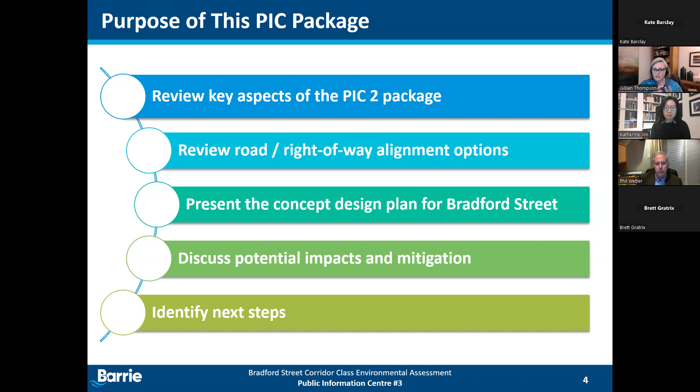So what is this study about? This project reimagines Bradford Street as a future multimodal corridor within the Urban Growth Center.

The long-range planning study will confirm and protect the right-of-way required to provide more attractive and accessible, sustainable transportation options, including improved sidewalks to enhance safety and accessibility for pedestrians and mobility device users, a new in-boulevard cycle track for all ages and abilities with connectivity to the mobility hub, GO, and the broader cycling network, traffic operational improvements to enhance safety and opportunities for transit priority measures, and a streetscape design to create a vibrant and attractive street environment that encourages active use.

Given the long-range nature of the study, there are no immediate capital works planned. This project is about protecting enough right-of-way space that the street can serve the needs of the future community to 2051.

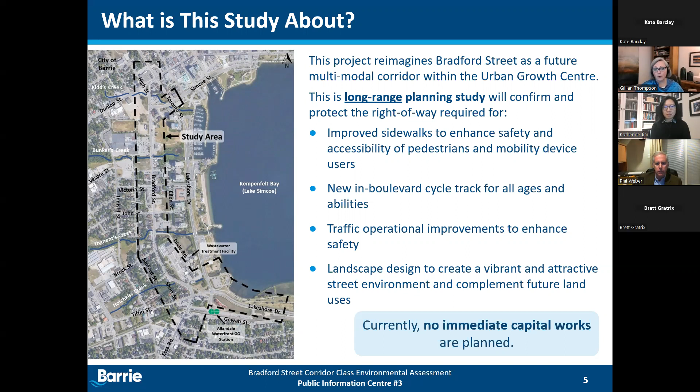The study framework we use here is called the Municipal Class Environmental Assessment, or Class EA. It's a planning and approval process for municipal infrastructure that follows Ontario's Environmental Assessment Act. There are 4 study phases with public, agency, and Indigenous community engagement embedded through the process.

We've moved through phase 1, reviewing the study background, the planning and policy context, and identifying needs and opportunities. In phase 2, we considered alternative solutions to address the needs and opportunities, and presented all of this information and the decision-making in PICs 1 and 2 in January and June of 2022, respectively. We're now completing phase 3, developing the design concept, and then moving into phase 4, the preparation of the study documentation.

In early 2023, we'll be reporting to Council, reviewing the study recommendations with Council for their consideration and acceptance. There's an opportunity at that time for members of the public to request delegation status at the Council meeting.

The date of the meeting hasn't yet been set, but will be advertised in the newspaper and posted on the project webpage. For those who've requested to be on our project mailing list, or who have registered for any of the PICs, we'll notify via email.

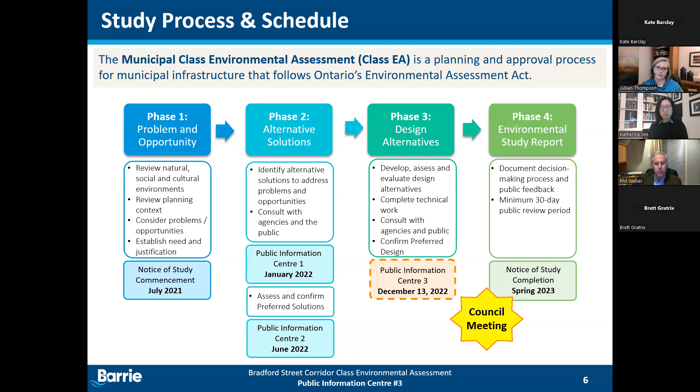The next few slides capture some of the key aspects that were presented at PIC 2 in June and provide important planning context for the decisions that we've made since then.

As I said earlier, Bradford Street is transforming, and there are numerous approved and proposed developments with more applications to come, and the city expects that the majority of the corridor will be redeveloped. The city's official plan designates lands abutting Bradford Street as high density, with a minimum building height of 12 stories and ground floor retail and commercial uses.

Bradford Street is the primary transportation link within the urban growth center and is being planned as a complete street that will be integrated with the future community and provides mobility for all users: transit riders, pedestrians, cyclists, mobility device users, and drivers. Overall, we will see Bradford Street shift to a more pedestrian-friendly environment, enabling people to live and work within a walkable community with easy access to public transit to encourage less vehicle use. That's the vision.

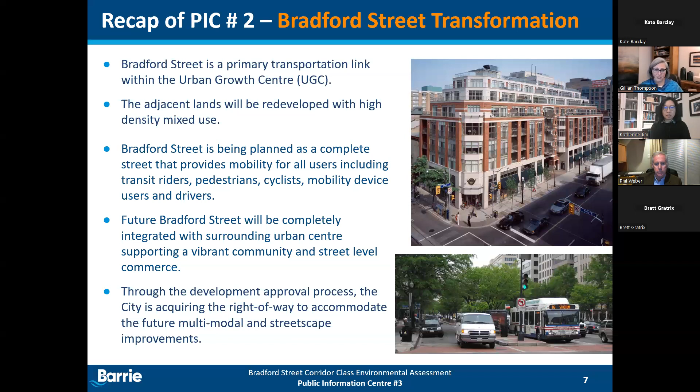At PIC 2, we talked about the list of potential planning solutions that we considered to address the needs of future Bradford Street. We looked at do nothing, access management, operational improvements, multimodal improvements on Bradford Street within an expanded right-of-way, reduced travel lanes and improvements within the existing right-of-way, and lastly, the possibility of addressing community needs by improving other corridors.

Our recommended solutions were to manage access, improve traffic operations, and expand the right-of-way to address multimodal needs, aligning with the vision for future Bradford Street as set out in the official plan and the Transportation Master Plan.

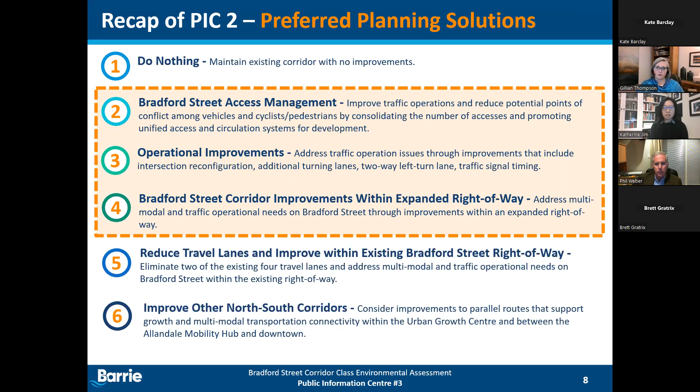Why these solutions? We're demanding a lot from Bradford Street in the future, and we need enough space to accommodate an in-boulevard cycle track and accessible sidewalks, street trees, planters and other landscape opportunities, street furniture, benches, bike racks, pedestrian-scale lighting, improved transit stops, future transit priority measures, operational improvements like turn lanes at intersections, and required setbacks for the hydro line and other utilities.

Our recommendation at this time provides the greatest flexibility for the city to respond to emergent technology and changes in travel modes and provision of additional amenities over the next 30 years. So while maintaining 4 lanes now doesn't preclude future decisions to reallocate space within the right-of-way.

And what does that mean? It means that in 30 years from now, if we see the shift to active travel and transit that we're hoping for, the outside lanes could be converted to on-street parking, electric vehicle charging stations, or an expanded flexible public space. We know that the city may consider a business case for a higher order transit network that includes Bradford Street in its upcoming Transportation Master Plan due to start in 2023. So again, we want to maintain that flexibility for future decision-making in this corridor with our recommendation.

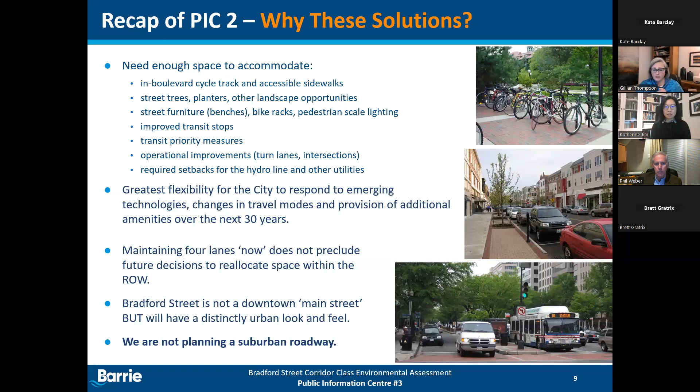So with that point, at PIC2, we introduced sketches of how future Bradford Street could look. This is one of those sketches, and we introduced this conceptual road cross-section to take a closer look at each of the elements that make up the right-of-way requirements. So Kate, this is a bit of an animation.

Let's add the sidewalk, setback, and buffer. Now let's add the cycle track and then the boulevard and curb. The boulevard space will be occupied by street furnishings, landscaping, the hydro line, transit stops, and pedestrian scale lighting.

And those all contribute to the vibrancy of the off roadway areas. Now let's add the travel lanes. We've accounted for a narrower inside lane and wider outside lane to better accommodate transit vehicles. And finally, the median area is an opportunity for street tree plantings mid-block with space for turn lanes at intersections.

As you can see, we are illustrating the hydro poles, and we've met with Alectra to talk to them about the project. The city may, in time, explore the feasibility and cost implications of burying the hydro. This isn't a decision that we'll make in this EA, but it will be something considered in future and in the context of land redevelopment.

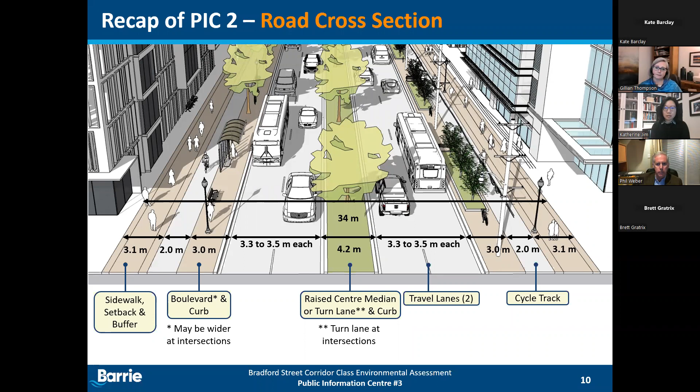In PIC2, we also reviewed the options for the Tiffin Street intersections at Bradford Street and Lakeshore Drive. Alternative 1 involves some reconfiguration and improvement while maintaining signalized intersections. Alternative 2 considered a pair of roundabouts with a mid-block pedestrian cyclist crossing to provide that connection to the mobility hub and GO. Each alternative offered distinct benefits and challenges to different road users.

With all things considered, in this particular context, we believe the signalized intersection design is slightly preferred because it's perceived by pedestrians, cyclists, and mobility device users as being more familiar, easier to access and navigate. It provides more direct routing for active users and mobility device users. It's generally better for accessibility for the hearing and visually impaired, and it's more compact and more desirable, perhaps from a human scale perspective, especially given the intensification and redevelopment that's going to occur around this area.

There may be better opportunity to incorporate transit priority measures like dedicated transit turn lanes, and generally the option has lower construction cost and is less complex in terms of design and construction. There was really good support for the roundabout option among PIC2 attendees and city staff, and certainly the city will continue to consider roundabout feasibility in other locations.

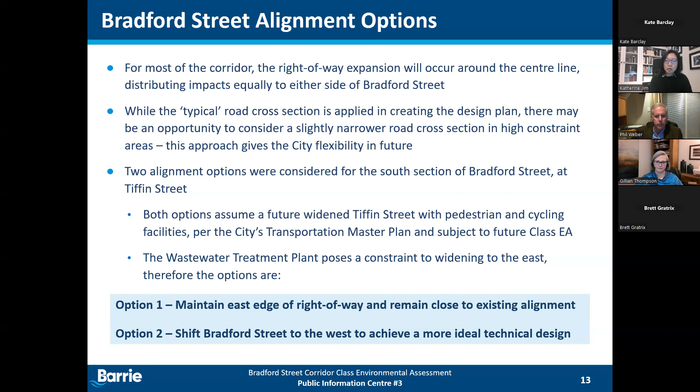Option 1 is to maintain the easterly edge of the right-of-way, close to the existing alignment of the road itself. Option 2 looks at potentially shifting it to the west to achieve a more ideal technical design.

In this slide you see the two options, with Bradford Street coming into the intersection with Tiffin Street. Option 1 is on top and option 2 is at the bottom. We have reviewed these two options in terms of land use, geometric design, and operation perspective.

Currently, Bradford Street is posted at 50 kilometers per hour, and it's assumed to remain the same in the future. Recognizing the urban nature of the corridor, we assumed a design speed of 60 kilometers per hour, which is typical when design standards call for 10 to 20 kilometers per hour above the posted speed. That means we're applying a set of design parameters for the curve of the road and the associated sight lines for this design speed.

From a geometric perspective, option 2 at the bottom is a more desirable design approaching the Tiffin Street intersection. Option 1, closer to the existing alignment, doesn't meet the parameters of our future design conditions. By providing a more comfortable angle through the intersection, option 2 allows better sight lines and overall network operation. Better sight distance also ensures safe operation for all road users, whether walking, cycling, or driving.

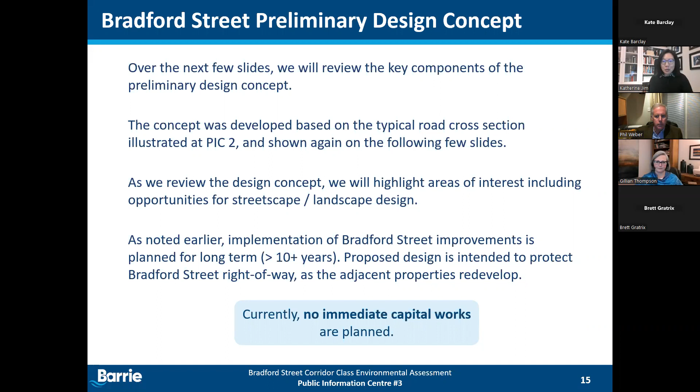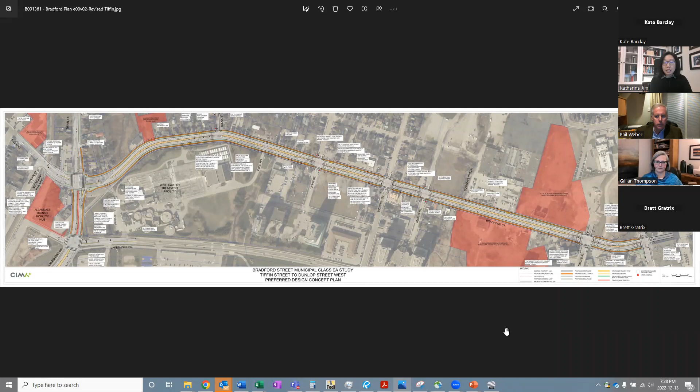On the plan itself, first off, from an overview perspective, the future development plans are shown in the red hatching based on what we found on the city's website. They're all in different stages of approval, but this is just to show that the corridor indeed is very active and more development plans may be coming.

In the middle of the plan, the gray and the lane marking shows the 2 lanes in each direction, same as existing, and generally keeping with the existing center line, other than in the Tiffin Street intersection area, where we will have a shift to the west, as we talked about a few slides ago. Now, as a concept, and as shown in the typical cross-section you saw, there may be a median provided in the middle of the road, and you see that in the yellow where landscape elements may be provided. This is conceptual only and will be subject to future development application and their approval on access management.

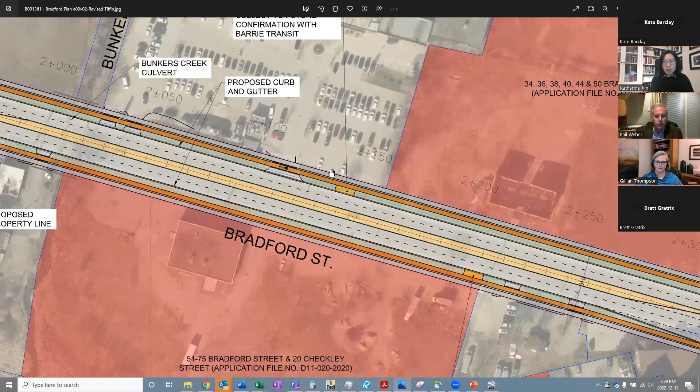Now, the boulevard on both sides of the road, these are essentially your new elements. As you zoom in, you will see the concept includes the 2.5 meter boulevard space in that light green color. Behind the boulevard, there's a 2 meter cycle track in the orange color, and the sidewalk is just adjacent to the cycle track on the outside. The boulevard space, cycle track, and sidewalk are on both sides of the road. You will see the existing property line in blue, and the proposed right-of-way line marked in a dash pink or purplish color. The land between the two lines reflects the area that will be required for the expanded right-of-way and for these new elements.

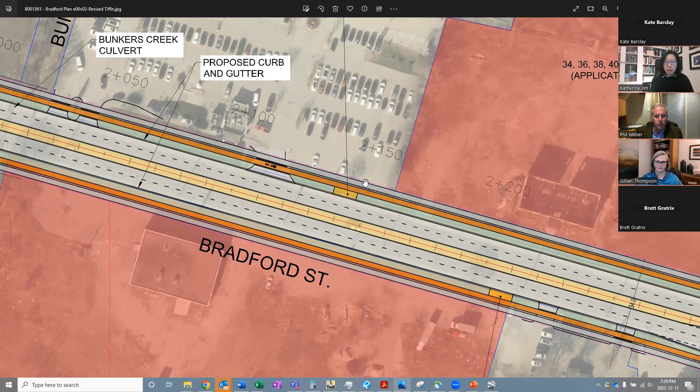So I'm going to walk through some of the main features from the south end of our study area at the Tiffin Street intersection first.

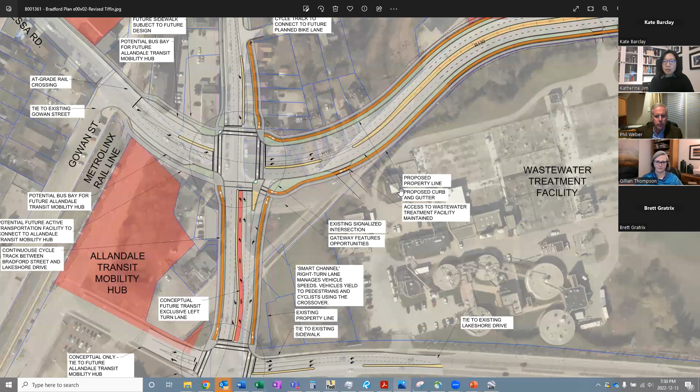Starting at the Tiffin Street intersection, we already talked about the shift to the west. In the southbound direction, we're going to be providing a double left turn, and you will see the transition of cycling facility on Bradford Street itself to a multi-use path on the west side of the road, and also a sidewalk on the east side. Just to orient ourselves, north is to the right of the page, south is to your left, east is the bottom of the page, and west is the top of the page.

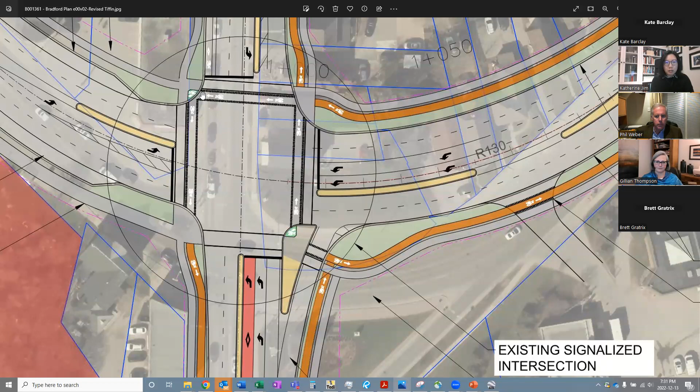At this intersection, we have space allocated for cyclists to park and wait for the correct signal to cross. Kate, if you can just zoom into the intersection a little bit, you can see the little green space that we have protected for cyclists when they cross the road. This is where they can park and wait for the right signal before they cross the road itself.

Kate, if you can zoom out a little bit. I want to highlight in the westbound direction at this intersection, we're also seeing a potential concept for an exclusive transit turn lane, and it's the middle lane that you see hashed out in the pink area. This is, once again, a potential concept for an exclusive transit lane going into the Allandale Mobility Hub.

On Essa Road, which is south of Tiffin Street, there are opportunities as well for a bus bay, depending on what the Allandale Transit Mobility Hub is planning to be. So you will see on the plan here, we've got some space allocated for a bus bay where the bus can pull in, again, for people coming in and out of the Allandale Mobility Hub.

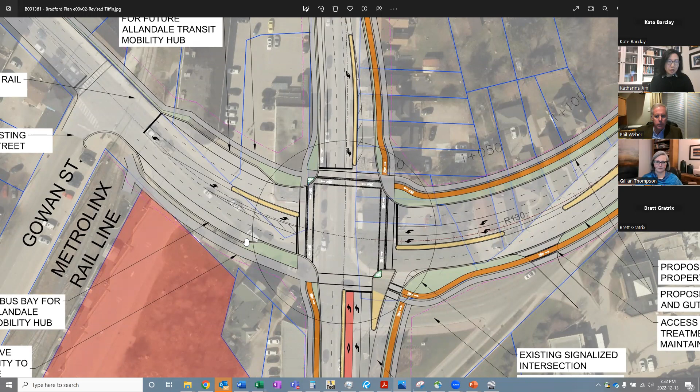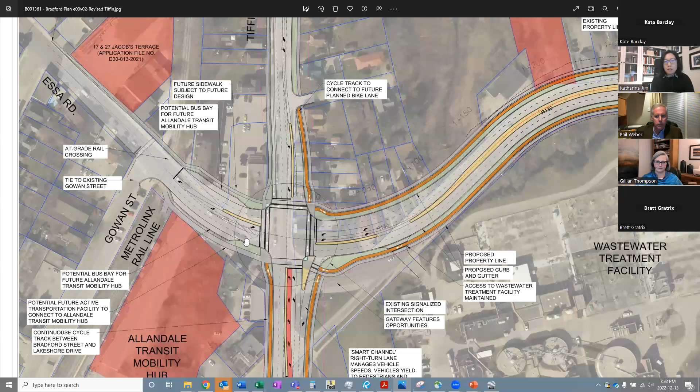By the time Essa Road approaches the existing rail track, the road will generally be reaching the existing elevation again, so we're not looking at major reconstruction of elevation at the intersection itself. Now, in the northeast corner at Tiffin and Bradford Street, because of the shift in the alignment, there's going to be opportunity for a gateway feature and other landscape elements.

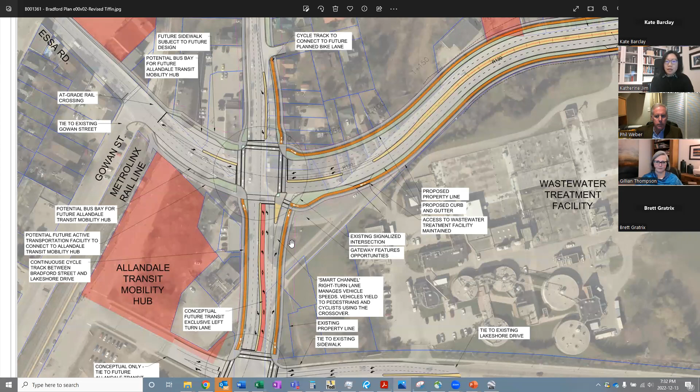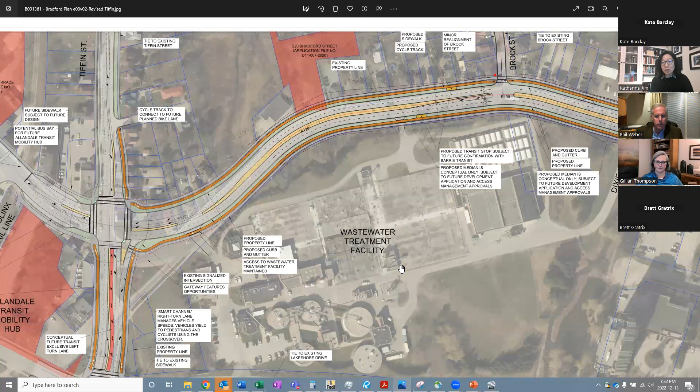As we head north from here, we see the water treatment plant on the east side. This aerial image is quite clear, you can see the water treatment plant itself. The existing access into the water treatment plant just north of Tiffin Street is going to remain. The treatment plant itself is a constraint, and the expansion of the right-of-way will largely be to the west in this vicinity, all the way up to just past Brock Street.

So this whole stretch between Tiffin and up to Brock Street, generally the expanded right-of-way will be to the west. We do take note of the location of the new right-of-way line for Bradford Street and the associated property impact. But again, we want to emphasize that this corridor is for the future, and improvement of the road will be driven by redevelopment.

You will see that we have made some notes of transit stop locations. For example, the one just south of Brock Street, you're going to see the little orange square there. Now, these locations are based on conceptual input from Barrie Transit. Recognizing these may change in the future, but essentially the footprint required for the transit shelter itself may be within the space of the boulevard.

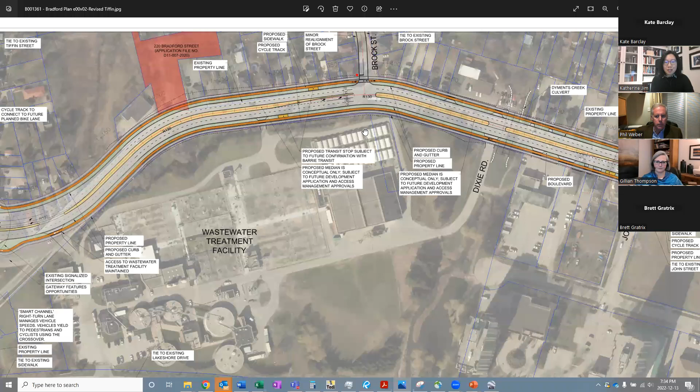Now, at Brock Street, this is our first intersecting side street. There's going to be a minor realignment to the road itself for better geometry and better sightline when turning into Brock Street.

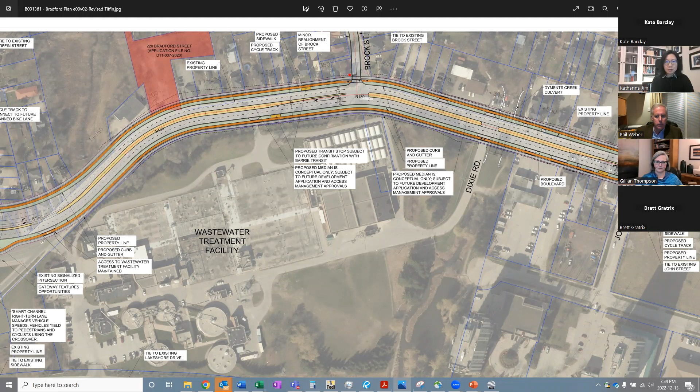As we continue north of Brock Street, access to the water treatment plant remains at Dixie Road. Again, you continue to see the median that is throughout the road in the yellow highlight. As we approach John Street, and from that point on to the north, the expansion of the right-of-way is generally along the center line. That means the frontage impact to the property on both sides are relatively similar.

At the John Street intersection, Kate, if you would just zoom in, and also similar at other side streets, you will see as an example that we have a cross ride going in the north-south direction. That's where the cursor is. You can see the marking on the street itself. That means this cross ride facility allows cyclists to continue their ride on the road without dismounting.

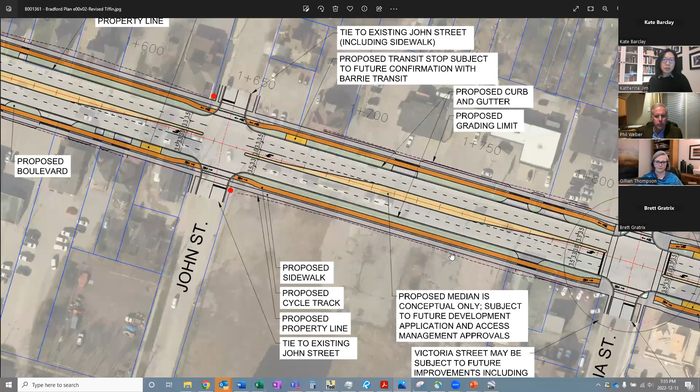You will see that the bike facility from Bradford Street will transition to the on-road facility at the side street. However, the sidewalk will be able to continue as you turn into the side street. And this type of treatment is actually very similar as we travel towards Victoria Street and Vespra Street. So Kate, if you want to pan very slowly so everyone can see, that's generally how it looks.

Now in this section of Bradford Street, again through John Street, Victoria Street, and Vespra Street, we do have a left turn lane provided at each of these intersections, once again allowing the ability to turn into the side street itself. Victoria Street will remain as a signalized intersection, and John Street and Vespra Street will remain as stop control.

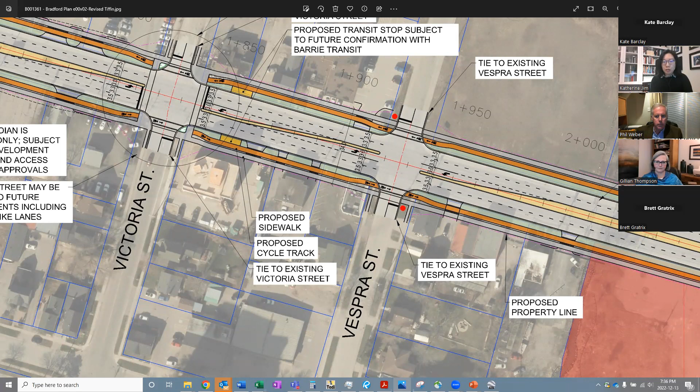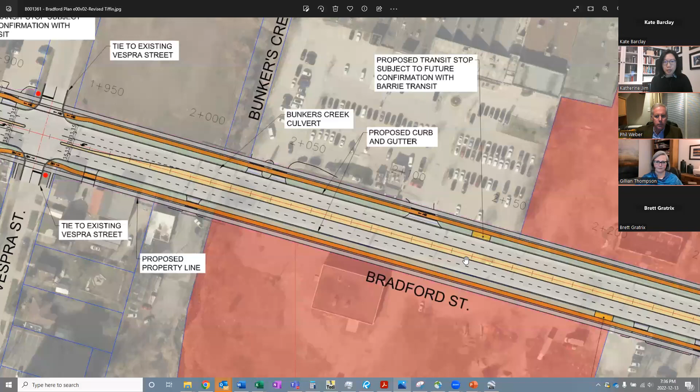As we continue to travel north and approach Simcoe Street, you will see the proposed development hatched out in red on either side of the road. Once again, the intent of this concept plan will serve as input when reviewing development applications, allowing the city to explain how much of the roadway elements is required to be protected within the road right-of-way, and how far the setback is required from the development property.

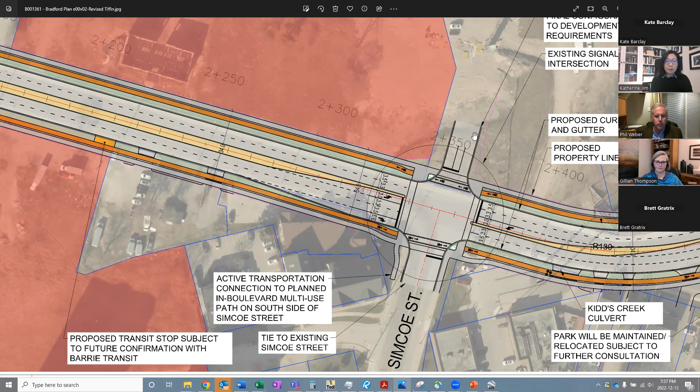Now at Simcoe Street, we do recognize that at that particular intersection there will be a future west leg into the development. We're only showing a very short stub in the concept, again recognizing that the full development of this intersection will be subject to the future development plan. As we continue to travel north on this plan, we're almost reaching our northerly study limit at Dunlop Street.

Our outside lane traveling north will become the right turn lane and drop off as we head onto High Street, because High Street is one lane in each direction. So we will have to drop one of the two lanes, but we will still have a left turn lane being provided at that intersection.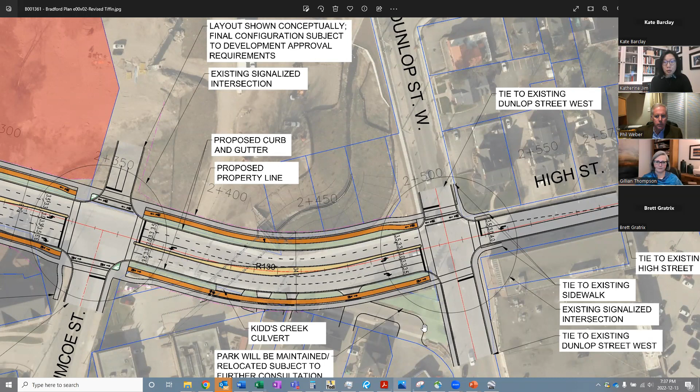The existing channelized right at Bradford and Dunlop is proposed to be removed. The driveway access of those properties on the east side will be replaced with a laneway, and the existing parkette in the southeast quadrant of Bradford and Dunlop will be shifted as well. In detailed design, there will be opportunity to look at how some of these features or materials within the parkette may be reused.

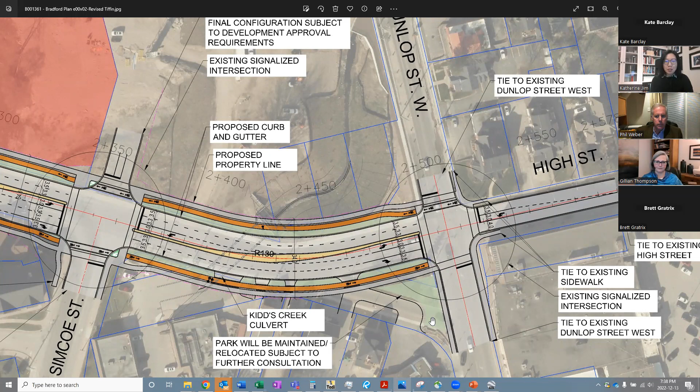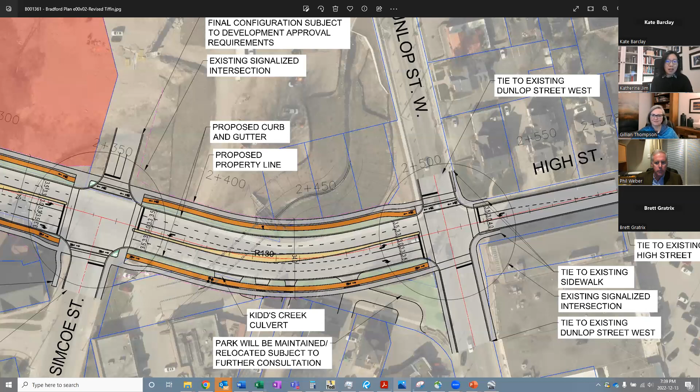Now, this is a very quick overview of the preliminary design plan. There's lots of information, and I'm sure it will take some time to digest, and there will be some questions towards the end of the presentation. The takeaway message is that this is a concept plan showing the future expanded right-of-way that may be planned to accommodate not just vehicles, but cyclists, pedestrians, transit, as well as opportunities for landscaping. Particularly in the area of Tiffin Street and Dunlop Street, there's potential for gateway features. So with that, I'll pass the presentation back to Gilly, who's going to show us a few renderings on how Bradford Street may look and the landscape design elements.

Thanks, Katherine. And Kate, before you leave that plan, I used the term access management earlier in the presentation, and it's sometimes hard to understand what we mean by that. But this plan view gives us a really clear picture where we have these stretches of Bradford Street with a continuous median and we're not showing any entrances to the development areas. There will be entrances, but our goal is to try to reduce the number of individual entrances and consolidate entrances into the new developments.

And why this is important is when we think about the objective of getting walkers and cyclists out into this corridor, we want to make sure they're able to move freely through the corridor without numerous stopping points at individual entrances and driveways. So when you heard me talk about access management as one of our recommendations in this project, that's what we're talking about - keeping those entrances consolidated in this future corridor, reducing the overall number, reducing those potential conflict points, so the corridor can operate as intended for active users. I just wanted to touch on that quickly before we left the plan.

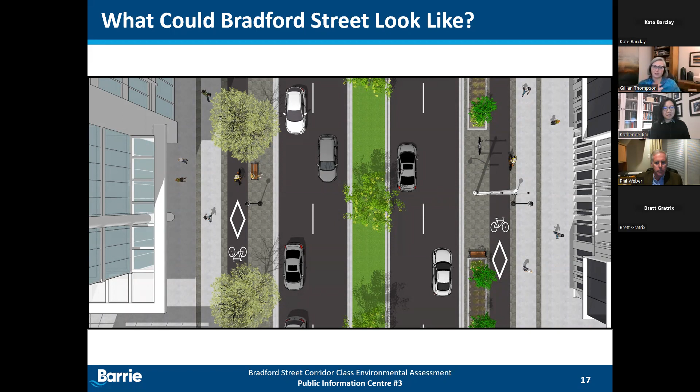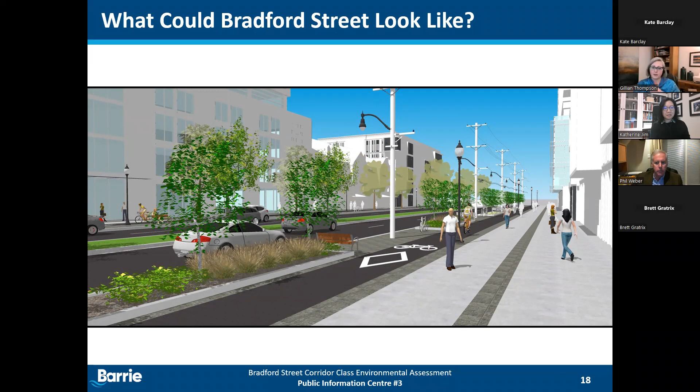This is a view from the other side of the road, and again the same idea with opportunity for trees in the median, trees in the boulevard, with the benefit in terms of thinking about climate change, shade, and lots of benefits there.

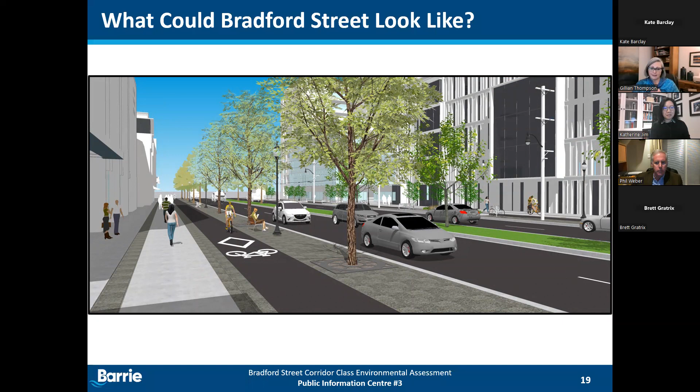Katherine alluded to this. In the next phase of design, a streetscape plan will be developed that lays out all the aspects of landscape plantings, furnishings, pedestrian scale lighting, and gateway features. The environmental study report, or EA document we're producing at the end of this study, and the design concept will reflect the design intent and principles to be considered in future. We want to make sure we're communicating the vision and intent of that streetscape plan for future designers. In terms of inspiration, we see opportunities for a really visually impactful gateway, like the Thunder Bay sign.

That's envisioned at the south end, adjacent to the wastewater treatment plant, where we're gaining a little bit of space. We could have enhanced intersection areas at the primary intersections at Tiffin Street and Dunlop Street - we already have those areas, it's just maintaining and enhancing them. There are street furniture examples, and even maybe a transit stop design. There are so many great opportunities to create a vibrant and unique corridor along Bradford Street, and we want to create that excitement for this future vision in the plan.

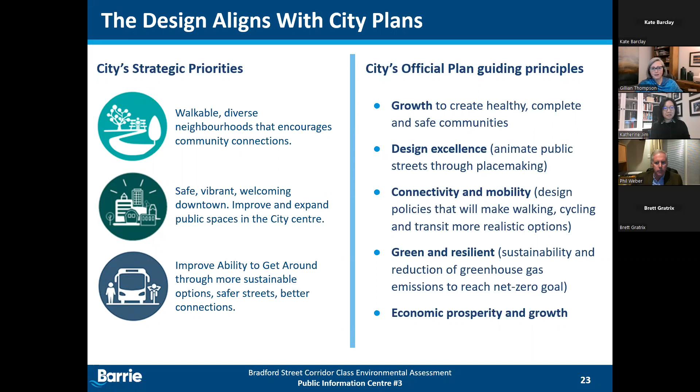We believe the design concept we've developed for Bradford Street aligns very much with the city's strategic priorities around walkable, diverse neighborhoods, improved and expanded public space that's safe and vibrant, and more sustainable mobility options and better connections. With the design concept and principles we've set out for future detail design, the focus will continue on accommodating planned growth in healthy, complete communities, creating a benchmark in design excellence by making Bradford Street a prominent place in the city center, a true destination with interesting aspects to draw people in, connectivity and mobility, green and resilient infrastructure, and supporting economic prosperity in creating Bradford Street as that desirable destination.

With the design concept complete and the future right-of-way requirements identified, we can now move on to completing the impact assessment, and that'll be our next step. In doing so, we consider potential positive and negative effects to socioeconomic, cultural heritage, and natural environments. We'll be looking specifically at drainage and stormwater, groundwater source protection, built cultural heritage and archaeology, natural environment, property and access, and climate change considerations.

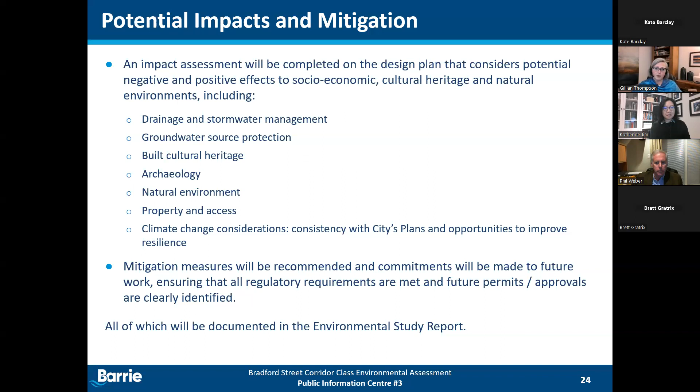We'll also be recommending at a high level, preliminary mitigation measures, and we'll be making commitments to future work, ensuring that all future regulatory requirements are met and future permits and approvals are clearly identified. This is a long range study, and we really see the commitments to future work as so important to guide further design and implementation in the future. All of this will be documented in the environmental study report, or the EA document.

So in terms of property impacts, what if your property is impacted by the project, and what does this mean? For properties that will undergo redevelopment, the recommendations in this study are for long-term protection. This means if a developer was to purchase your property or develop a property they own, that developer will need to convey to the city the identified road right-of-way as a condition of approval. This is a typical requirement and common across the city and in growing municipalities, and is how rights of way are conveyed to municipalities through the development process.

For properties that do not undergo redevelopment, when the city proceeds to implement the project, the city will purchase the required properties at fair market value. There's a whole realty process around that that we won't get into here, but if you're a property owner and you've got questions, we can take those conversations offline. Again, the project isn't budgeted in the current 10-year capital plan.

But if you are a property owner and have more questions about the project and how it relates to your property, please reach out to Brett, the city's project manager, after this meeting, and we can set up a time to have a conversation about your case. In the interest of time tonight, we know there will be interest, but we don't want to spend general time focusing on property by property questions. So follow up with us after - we're happy to have those conversations. We'll review Brett's contact information at the end of the presentation.

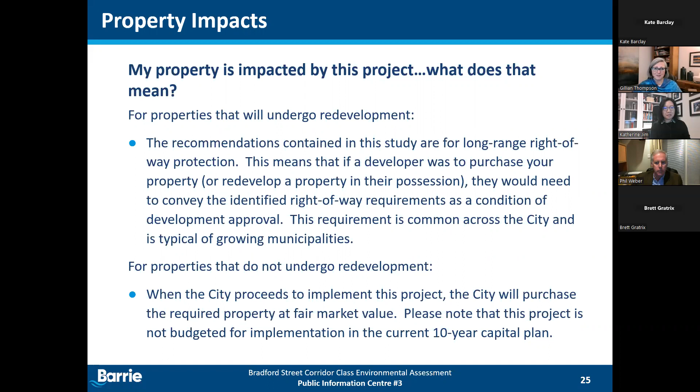Thank you for sticking with us. It's taking a little bit longer than we had anticipated, but lots of information.

In terms of next steps in the EA process, the project team will review and consider all the feedback we receive from the public, agencies, and Indigenous communities. We'll refine the design concept in light of the feedback where it's appropriate. We'll complete the final impact assessment, the preliminary mitigation recommendations and commitments, prepare the environmental study report to document everything, and prepare a staff report to council containing the study recommendations for council's review and acceptance.

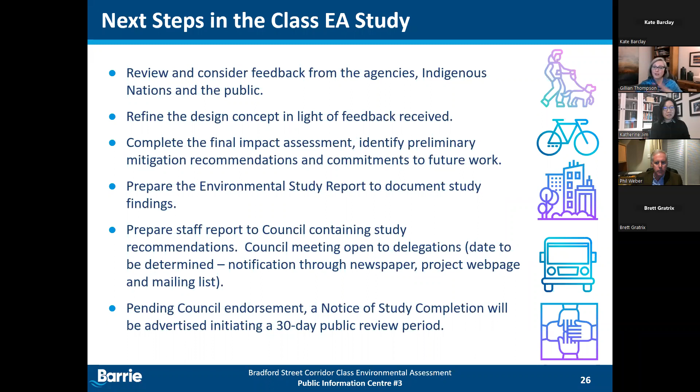That council meeting will be open to delegations. The date is to be determined. We'll be notifying through the newspaper, the project webpage, and if you're on the mailing list or have registered for any of the PICs, you'll get a direct notice. Pending council endorsement, we'll issue a notice of study completion that starts the 30-day public review period, where you have a chance to look at the entire EA document.

Beyond this Class EA study, we wanted to talk about this because of the long range nature of the study. The shelf life for a Class EA study is 10 years unless any aspect of the plan has been implemented.

This Class EA is about long-term protection, but the implementation of the design will be driven by the pace of redevelopment. If redevelopment advances quickly, the implementation timeframes may be accelerated. The capital program is reviewed each year by council, and priorities are set based on what's happening in the city, and various pressures and priorities shift from year to year.

If development occurs at a more modest pace and 10 years elapses with no part of this plan being implemented, then the Class EA study will be refreshed or updated through an addendum. The addendum basically confirms or refines the design plan relative to the transportation and planning context of the day, and it would also include a full consultation program similar to this EA study.

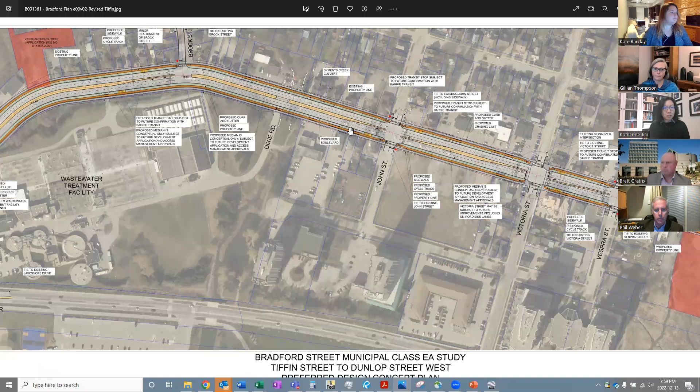So maybe with that, we'll get on to some of the specific questions. The first is actually a comment about potential impact to properties on Sanford Street, a parallel road to the west of Bradford Street between Brock Street and John Street area. The question is whether any property will be expropriated by the city to accommodate this plan. Our design concept plan shows the expanded protected right-of-way on Bradford Street only. Property on the adjacent parallel street is not expected to be impacted directly as a result of the improvement on Bradford Street.

Our next question relates to how we may use the right-of-way space, for example, whether consideration of automatic public toilets or a restroom area may be considered in our right-of-way layout. At this time, we haven't fully explored the detail of what may be some of the potential elements in the right-of-way, but that's certainly an interesting and good suggestion. Those are some of the emerging technologies and things we will be grappling with accommodating in the future.

So we haven't addressed that specifically, but this kind of falls into that category of things coming that will be looking for space in the right of way.

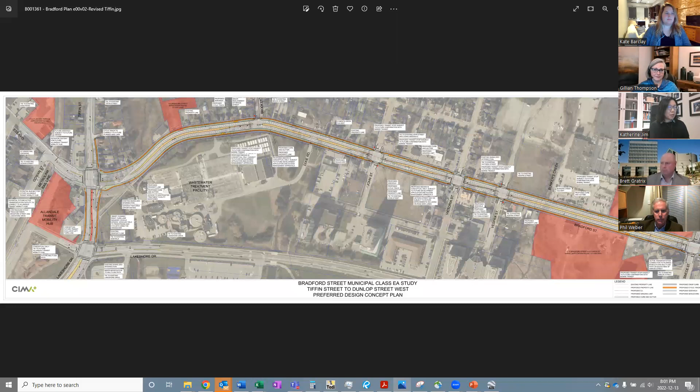Good question, thank you. The next question references a meeting with the consultant for the proposed Performing Arts Center. That meeting happened last week, and it noted that the architect advised Simcoe Street itself would be extended to the west of Bradford Street and disappear, contradicting our plan.

I think in this case we do acknowledge that there will be a different type of development happening on the west side of Bradford Street, with Simcoe Street being extended. We do recognize that. But at this time, the plan is certainly very active, and I don't think there's a specific approval process at this very moment. So we do acknowledge that the road itself will be extended.

Gilly, did you want to add? I'll just add that we'll make sure what we're reflecting is current as of when we finalize the report. Your point's taken that things are very fluid right now with the development applications, and essentially when our report is finalized, we'll have to timestamp it and accept that it reflects known conditions at the time of finalization. Thank you for the heads up, and we'll track that and follow up with Brett and city folks as well.

Just to clarify, the west leg of that intersection is more of a placeholder. There will be access of some sort, but that's still being worked out. We'll finalize it based on the best available information at that time, as Gilly said about timestamping, and then it'll be an ongoing live discussion with the development parcel on Bradford Street and the Performing Arts Center about what that looks like. This isn't going to tie them into a very specific design at this point, just a general concept.

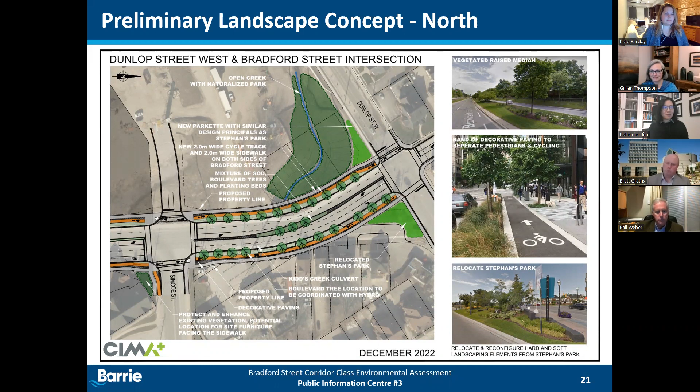Mute, Phil, you're on mute. You're still on mute. Sorry, third time's the charm.

I think we kind of missed the comment about the welcome sign for downtown Barrie BIA, but that's just a general comment. I think the trade-off for Bradford Street and Lakeshore is that Lakeshore is more of the scenic drive, and Bradford's going to handle the heavier traffic from downtown to the Allandale GO hub. So that's kind of the vision.

Bradford's going to be more of the heavy-duty traffic spine. It's slated to handle a significant amount of traffic, and that's what the modeling is going to show. We expect it's going to be a fairly functional corridor. Having said that, both corridors are going to handle a fair amount of traffic, and there's only so much we can do to disperse traffic between the two. So the traffic's going to go where it's going to go, and both roads are going to be busy commuter corridors no matter what we do.

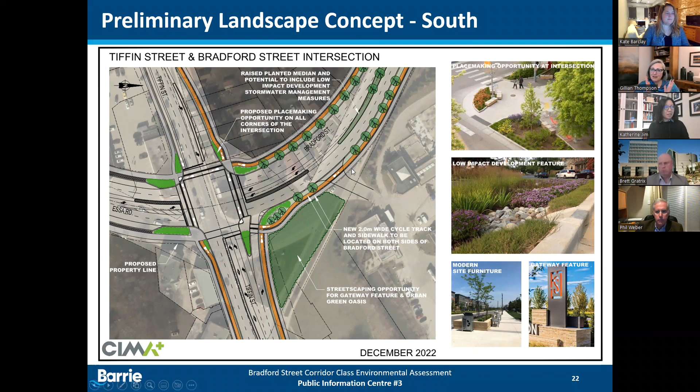Brett, great, anything to add? No, that's great. And that's the real benefit with this process, is that we'll be able to take a lot of these suggestions back and put them for future consideration, whether it's through detailed design implementation, or if we find ourselves doing an addendum to fine tune some of these details and excellent suggestions.

Great. So we have a question about more of the EA process itself. It's asking, what does it mean in terms of shelf life in the next step of the Class EA in 10 years? So Gilly, maybe you can expand on that.

Oh sure, I'm just looking for that question, it must be a little further down. What we mean by shelf life is when a Class EA is completed, we look at existing conditions, the planning context, the policy context, and all of those elements factor into the decisions we make and the recommendations of the EA. If more than 10 years has elapsed since the EA was completed, and there hasn't been any movement in terms of implementation, like nothing's been constructed, then it's good planning practice, and actually required, to go back and recheck all of those elements.

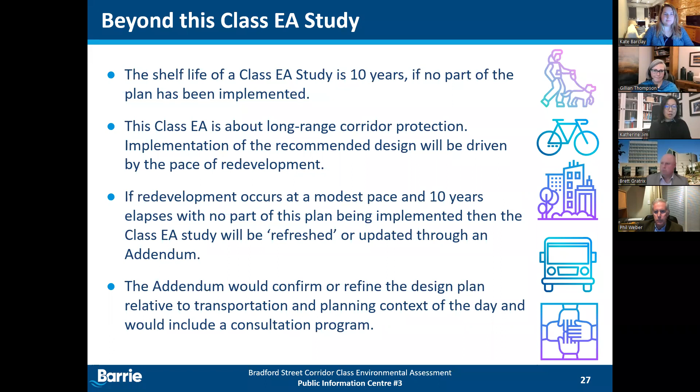Thanks, Gilly. Back to questions related more to community impact. We have a question: we haven't mentioned anything about the potential effect on the quality of life of residents living out on Sanford Street, and buildings that are 3 stories high are going to create some shadow effect on family homes, and this is going to be a problem.

So I think that's more related to the future planning of the corridor itself. So Brett, perhaps you may want to take this one. Yeah, more of a land use planning question.

This is really focused on the corridor in response to the official plan, as a parent document the city uses to then build upon children plans, which would be your master plans. So the land use planning comments probably go best towards the OP, the official plan, which was just updated. And then our zoning bylaw coming out as well, which will be the next opportunity in Q1-ish on buildingbarrie.ca to provide feedback on building height and building massing. But we can definitely take that comment and pass it on to our planning department. Thank you.

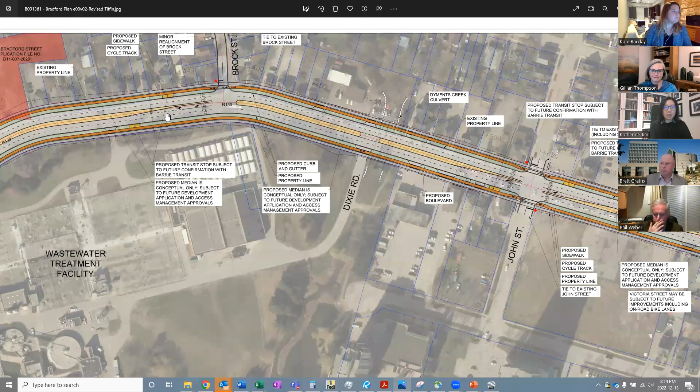The next question is related to the Bradford and Tiffin Street intersection. The comment is that the right-hand slip lane is being maintained at the intersection itself, and that these slip lane designs are known to promote high speed and a dangerous situation for pedestrian and vehicle interaction.

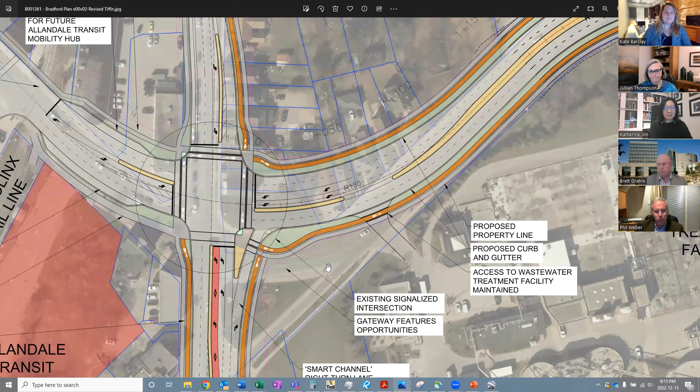I think we're talking about that channel going from westbound Tiffin Street onto Bradford itself. So maybe Phil, I'll let you take this one. Sure. Yeah, we've changed the design of the slip lane. Before it was a much broader and wider design, which promoted high speeds. We've changed it to what we call a smart channel design, which ends in a yield condition.

So drivers come to a yield or almost stop, then look to the left and make a right turn. But this isn't cast in stone. We do need some sort of exclusive right turn because the right turn volumes are really, really high. So it could be a smart channel design like this, or it could be just a right turn lane, an exclusive right turn lane.

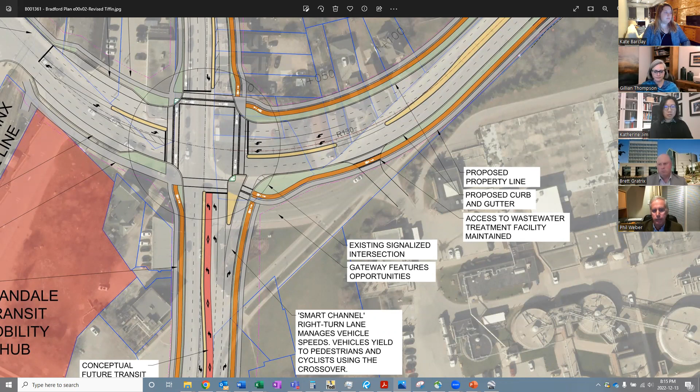This is what we've done at Bradford and Lakeshore - we're just showing a right turn lane there. So it could be either a smart channel design like this or a right turn lane. We've shown the smart channel design here and the right turn lane design at Bradford and Lakeshore. So it could be one or it could be the other.

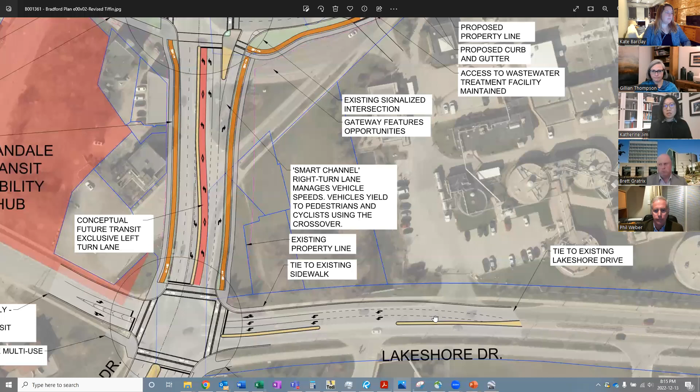Here we're showing just an exclusive right turn lane, more because of the geometry of the intersection - it's coming in at an angle, so it's easier to design a simple exclusive right turn lane here than a smart channel design. But these are just preliminary designs. Detail design is when you make the final decision on these types of things. So for now, we're showing one design at one location, one at the other. But in detailed design, you'd make the final decision as to which design you go with. These aren't cast in stone at this point.

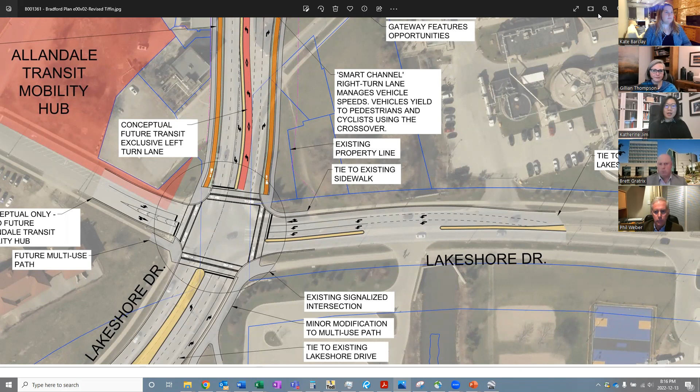Great, thanks Phil. Our next question is related to the dimension of our cross section. The question is asking about the width of the travel lane that is out there now, and also whether we have considered a 3-meter lane for the future design, as it is a more urban road, and that 3-meter width could provide greater traffic calming, safety, and pedestrian access.

So just reflecting back, our typical cross section right now is showing an inside lane of 3.3 meters and an outside lane of 3.5 meters. So maybe I'll start off with the answer.

I think, as Gilly mentioned, the cross-sectional element at this point is what we're proposing as a concept. So in the future, it does allow the city to make certain modifications in the cross-sectional element dimensions. In this case too, we also need to think about what the lane needs to accommodate - for example, transit vehicles sometimes have certain requirements when it comes to lane width. So we do need to take that into consideration as well.

Brett or Gilly, do you want to jump in?

I think you've explained it well. We're being a bit cautious about being overly aggressive, recognizing we're not moving to implementation. There will be steps in between. One concern is if we move to higher order transit, accommodating that width. We don't want to tell a story where we're demonstrating a surplus of width. These are reasonable lane widths, not saying they couldn't change.

But that's a real concern, that next step of transit, and what that needs in terms of right-of-way space and lane configuration, which may get bigger depending on what that looks like. That would be subject to justification through our transportation master plan update. But the biggest takeaway is none of these dimensions are absolutely fixed in stone, and there will be adjustments to them closer to implementation based on the context of the day on the corridor.

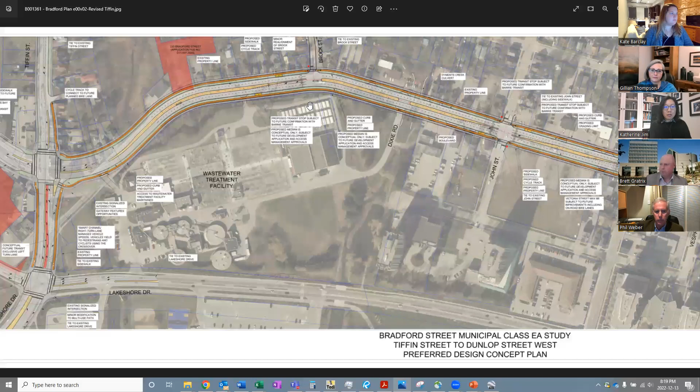Thanks, Brett. Our next couple of questions relate to the intersection itself. One asks whether a traffic light is actually needed to safely cross Bradford Street at Brock Street. Right now, pedestrians need to go northbound to use the northbound bus stop, and will have to walk about 400 meters south or 500 meters north to safely cross. A similar comment was made about crossing Bradford Street at John, which is also a challenge, and why stop signs are still being recommended except at Victoria.

I think the signalized intersection at Victoria is an existing signal, so that remains. At the other locations, maybe Phil can jump in on what our traffic analysis shows about the operation of these intersections, at John and also at Brock Street in particular. I'd have to dig up the traffic report, but I believe in the future these intersections will be signalized. It's just a matter of at what horizon period the conversion would happen.

So on our plan, we're showing it as a stop sign, but in future the intent is to signalize them. But that doesn't help those people right now who are trying to cross the road, I realize. We'll take that comment back because that is a long stretch of roadway, so thank you for that feedback.

Maybe a related question is how the design aligns with the city's goal of Vision Zero. That's a great question.

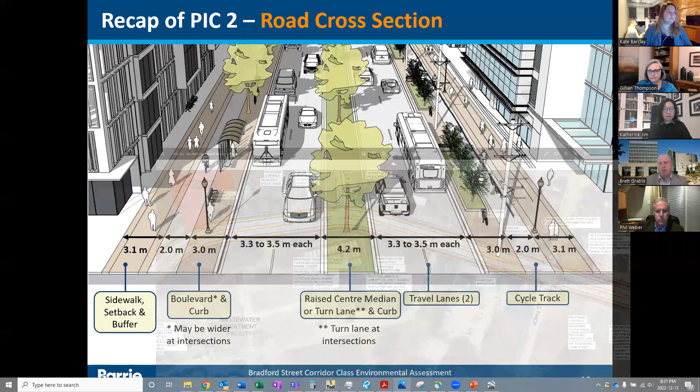I think the big improvements are multifaceted. Creating safe space for pedestrians and cyclists is the number one thing we're doing here. Right now we have curb face sidewalks, which is a lower level of service, probably at the bottom end of the active transportation level of service rating scale, and we're advancing that to the highest end. Moving to a fully physically separated cycling lane is again a very high level of service, and moving that farther away from the travel lane as much as possible pushes that even higher. So making sure we're taking care of our most vulnerable road users is the most important part of Vision Zero, and advancing that.

The other big element is the access management perspective. That ties into Gilly's comments about working with the development community to embrace the bigger picture and push them toward consolidating accesses on this corridor, which also improves safety for road users as well as those in the boulevard and active transportation.

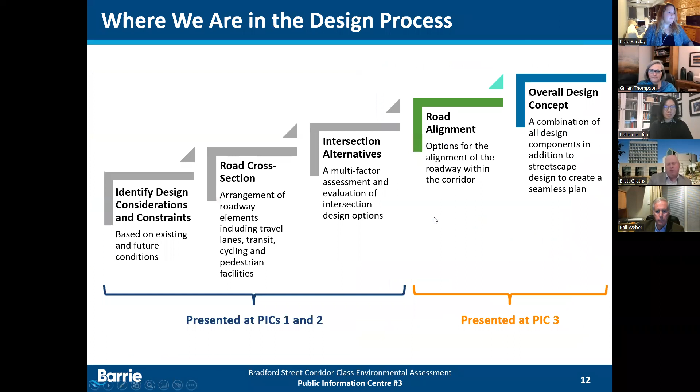The third element is the improvements proposed as part of the realignment of the intersections at the south end, especially Tiffin and Bradford Street. That shift to the west significantly improves sightlines to the intersection, as well as the tangent approaches. We're not having as much curvature through that intersection as there is today, which would get worse with alternative 1. Alternative 2, which is what we're recommending, is a big improvement over what would be there.

So it's kind of a multi-factored approach in this design. When we do go to advance this project further, we'll be looking to test this against latest best practices to make sure that we're in alignment with that. Even things like what Phil was talking about with the smart channel, is that the best case? We'll also be looking at the curve radiuses themselves and the geometrics of the roadway. Can we tighten up any of those radiuses to help slow vehicle speeds down, just based on better geometric data when we do go to design that road. So that'll be part of the commitments we make going forward. It definitely will move the bar significantly forward in the lens of Vision Zero.

Great, thanks, Brett.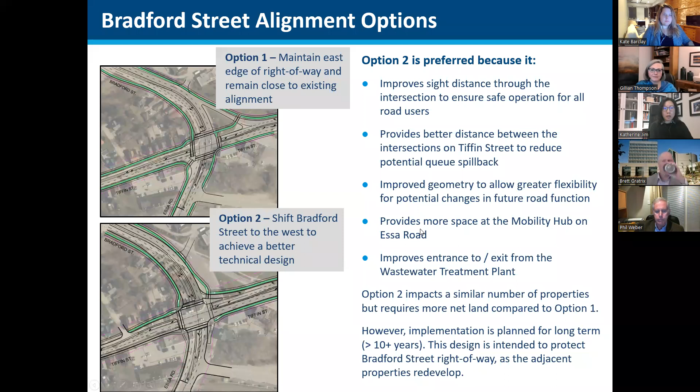We have a couple of questions regarding the road element itself. For example, one comment suggests it would be helpful to make one of the car lanes a dedicated transit lane, and asks whether that's an option. I think Gilly pointed to it that the city will be carrying out a transportation master plan in 2023. The question of the potential of higher order transit is intended to be answered at that time. So Gilly or Brett, what do you want to expand on that?

I'll maybe add to that, and Brett can jump in. Certainly with the current transportation master plan, the option or possibility of having an HOV, a high occupancy vehicle/transit priority or transit lane for that outside lane, was identified even in the 2019 transportation master plan. So that's definitely on the radar, although we haven't shown it in our typical cross section. The intent is there. We're recognizing the possibility of those outside lanes becoming dedicated transit lanes. That goes back to some of the rationale and decision making when members of the public early in the study asked, can you reduce this to two travel lanes and make improvements within the existing corridor? That desire to have dedicated transit lanes to encourage ridership and transit efficiency was certainly part of our decision making at that time. So it's a great suggestion, and it's definitely something the city's been contemplating, and this plan protects for that.

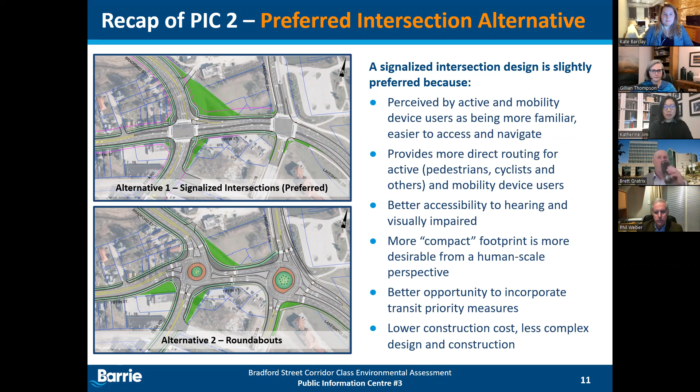Okay, thanks Phil. We have a comment here asking whether Barrie would consider not having as many turn options through the boulevard, and instead having U-turn lights at each intersection for those needing to access the opposite direction. Brett, maybe you can comment on the city's experience.

That's a comment we can take back. One of the challenges is it does take more right of way.

That's probably the biggest barrier to that, but that is a potential solution to the median barrier challenge. There is a grid network in that area as well, recognizing there are pros and cons with that. But that's something we can take back and look at, while staying cognizant of the feedback we're getting about not creating more right of way. So it's a delicate balance for this corridor.

Our last question this evening is asking about who's going to be paying for the proposed improvements, and whether this will result in higher property taxes.

A lot of this work is attributed to growth, so it will be captured in our development charges study. It is today, but not to this level of urbanization. When we see the development happen on this corridor, as envisioned through the official plan, the business case should be there to justify the investment in creating a pedestrian-friendly space. What we're seeing from internal feedback and external consultants is that investment in the public realm and active transportation helps offset investments in additional lane widening, keeping the corridors a bit narrower. So it's important to keep the financial conversation in context of the broader network.

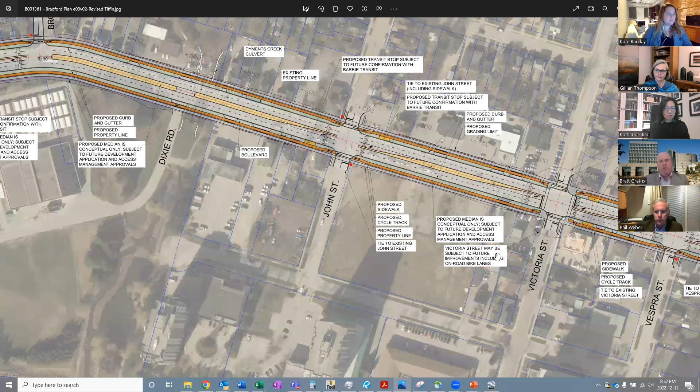That's a challenge with just the road network in the downtown, and I don't think there's going to be a silver bullet solution to make that better. That would be referring to the westbound left onto Lakeshore backing up, and then the challenge making that straight-through move on Simcoe to connect to Bradford Street. Yes, it's a challenging location—it's really a function of the number of closely spaced intersections along there.

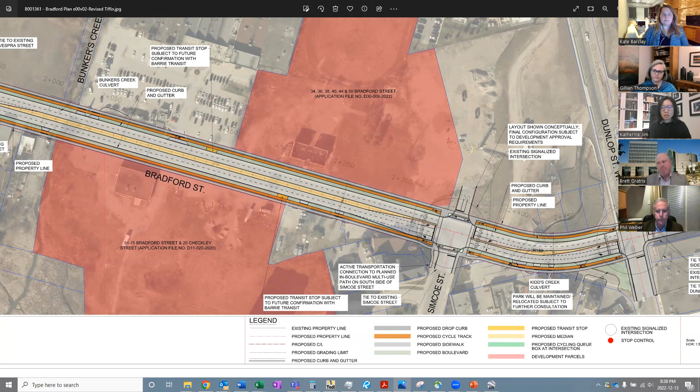That feeds back to the access management discussion as well, but also the signalization of those other intersections, which we'll have to review to confirm. When we have too many intersections in close proximity, you get poor traffic operations, and that's what we're seeing in this location. We really try our best to space things out, but that's our downtown fabric—that's common in many downtowns. With the pinch point at the bay, it really exacerbates the problem—everyone's trying to get around the bay at that one location, and there's only so many places to do it. Not probably the answer you're looking for, but that's the state of the union on that. There may be some things we can do with an interconnected signal network, but there's only so much we can do.

Great, thanks Brett. Thanks, Phil.

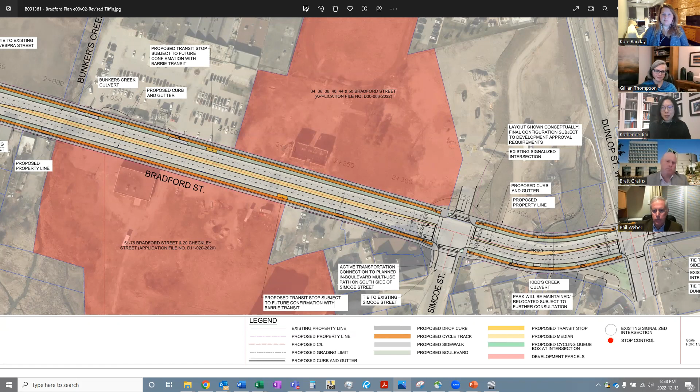This is our final question that just came in: wondering why we would still be considering electrical wires above ground when we have difficulties with our type of climate—why not just put wires in electrical boxes underground from the start? I think this relates back to the potential of burying some of the hydro wires, and this is a potential that may be reviewed with Elexicon during detailed design. I was just going to ask Katherine what Elexicon said about the cost premium of burying.

I'll have to go back to my notes, but it is something quite significant. I think, like you said earlier, this is not something we would be making a decision on specifically during the EA, but it is something we will be incorporating in our response or comment record.

Just a bit more commentary. I absolutely understand the aesthetic standpoint and I totally agree with that. One of the challenges on the Bradford Street corridor, and this doesn't mean it won't happen, is that the higher voltage lines on Bradford Street are much more prone when underground to issues with breaking, and repairing them is actually more costly from a life cycle perspective, even accounting for storm damage. I don't have a complete analysis of what Elexicon's done, that's just anecdotal, we'll look into it more. But once you get into it, it's much more nuanced than just agreeing they're ugly - there are challenges, especially with those lines and the functionality of feeding the wastewater treatment plant and having that redundancy. So it's a multifaceted problem, but one we'll definitely flag as a big public interest to look into burying those.

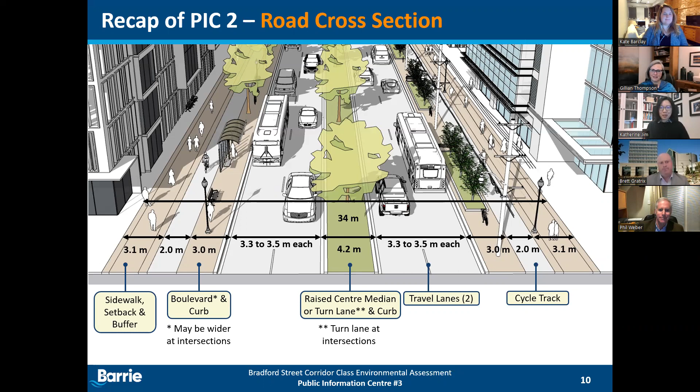Great, thanks Brett for speaking to that. So with that, I think that's all the questions we have from this evening.